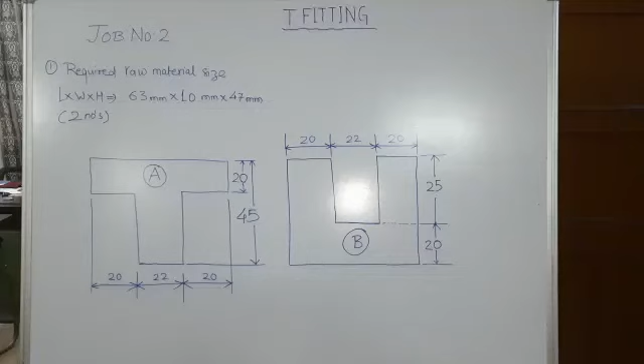This is job number 2, T fitting of the fitting shop.

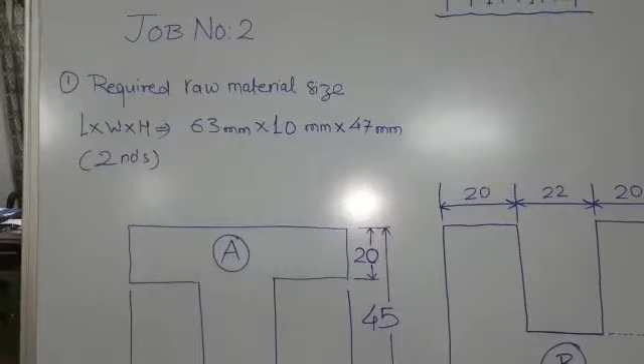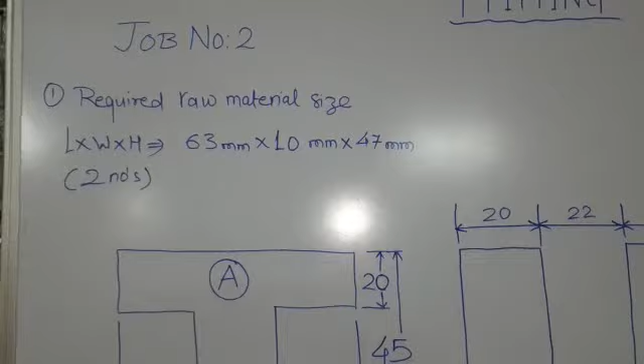The size of the required raw material is MS flat, mild steel flat, having length, width and height of 63 mm, 10 mm and 47 mm respectively. And these are the dimensions which we will achieve after the different operations.

The final job will look like this: T fitting.

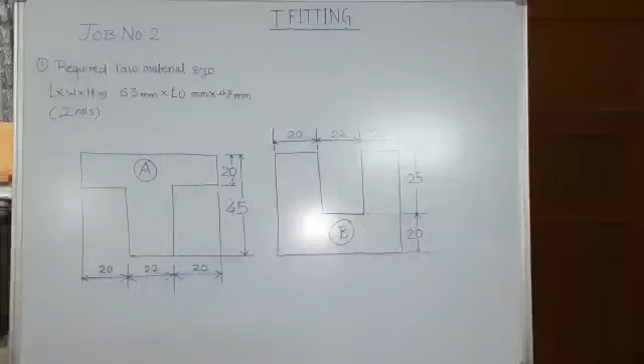Now we start to make a T fitting from the given two MS flats. The tools required are bench vise, steel rule, square, tri-square, ball peen hammer, scriber, hacksaw blades, dot punch and center punch, surface plate, vernier height gauge, rough and smooth flat file, flat chisel and triangular file.

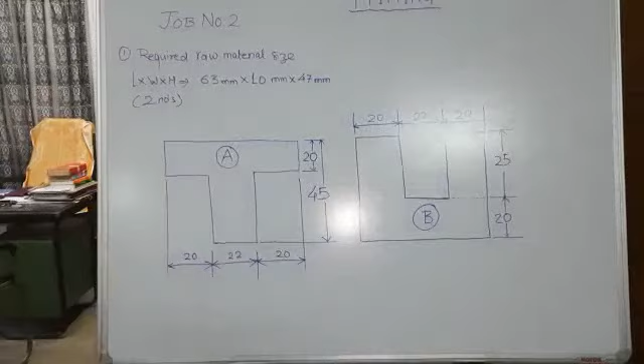Sequence of operations will be: filing, checking of flatness and squareness, marking and measuring, punching, sawing, chipping and finishing of the workpiece. Again we will start the procedure.

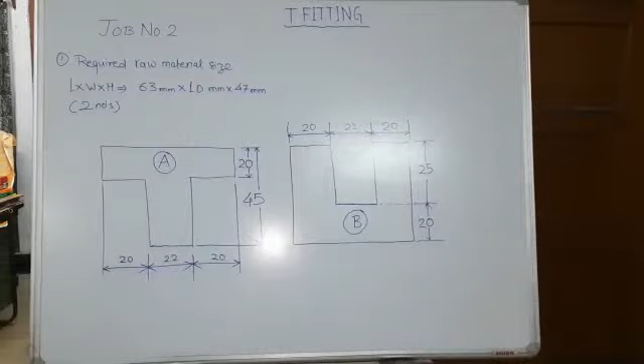First we measure the dimensions of the raw material. These are the two raw material MS flats. You can see after the cutting there is burr. The burr in the piece is removed and the dimensions are checked with the steel rule or vernier caliper.

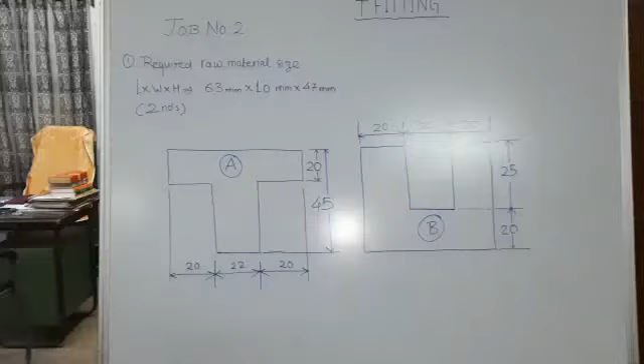Sequence of the operation will be filing, checking of flatness and squareness, marking and measuring, punching, sawing, chipping and finishing of the workpiece.

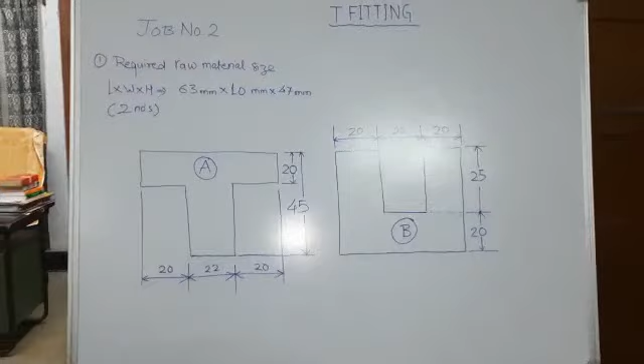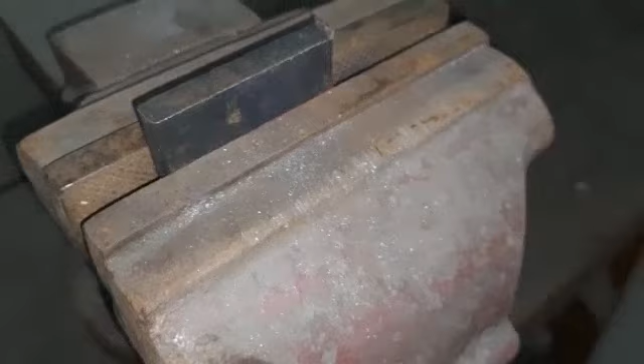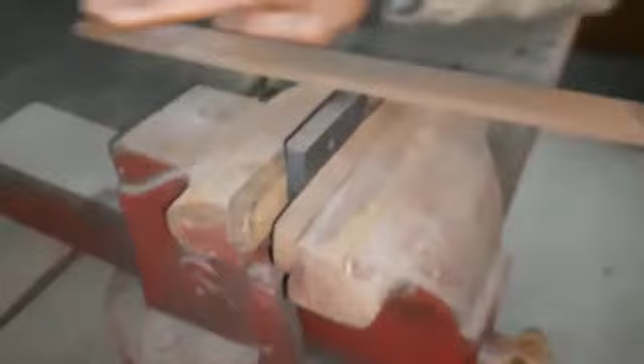Now this job has been fixed in the bench vise, and with the help of a rough file we will remove the burr from this metal. Now you can see after the filing operation, the burr has been removed from the surface of this workpiece.

Again we will remove this job from the bench vise and go for measuring the dimensions of this MS flat. Now you can see these two raw materials, and we will check the dimensions one by one.

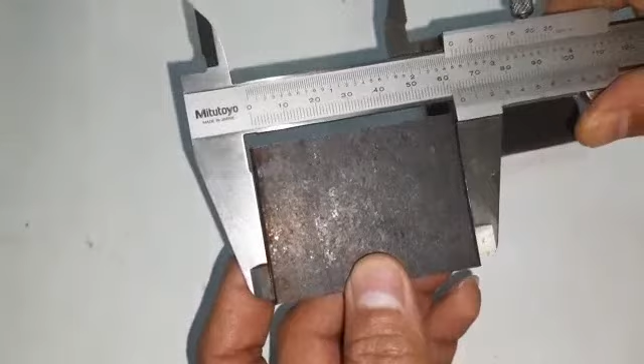You can see 63 in length, and 47 in height. In width this is 9.6. Okay, now we will take the second one.

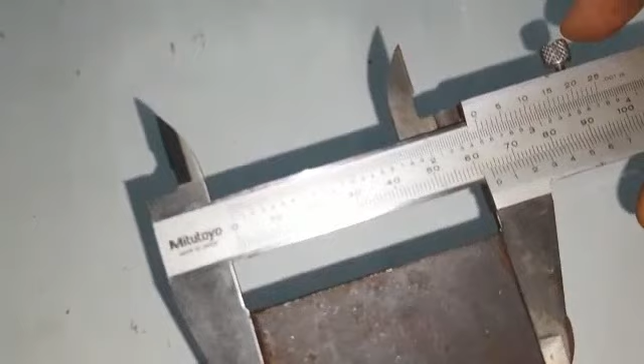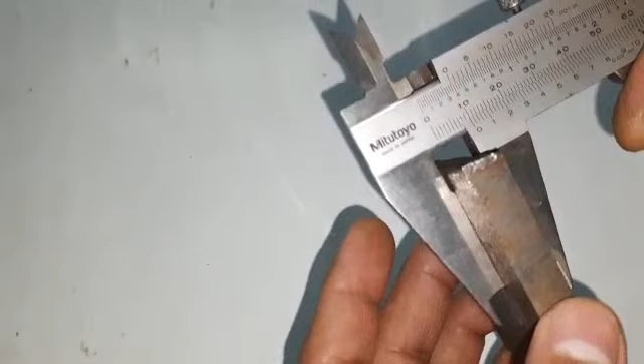Length is 62.5, height 47.5, and width is 9.7.

Now these two pieces are clamped one after the other and the outer mating edges are filed using rough and smooth file to achieve the dimensions: 45 in height, 62 in length, and thickness of 9 mm. Both pieces are filed to achieve these dimensions, and then we go for further operation.

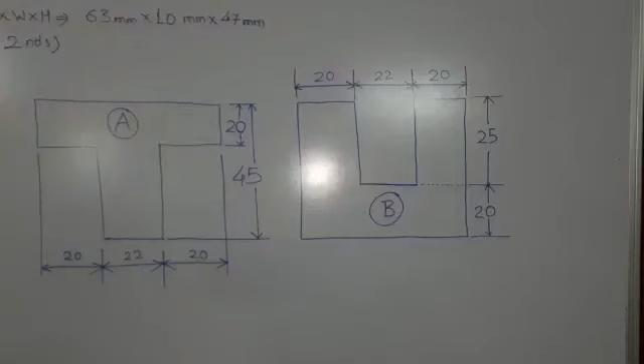First we start filing on these pieces. After the filing operation, with the help of the tri-square we check the flatness, straightness and squareness or right angles between adjacent sides of both workpieces.

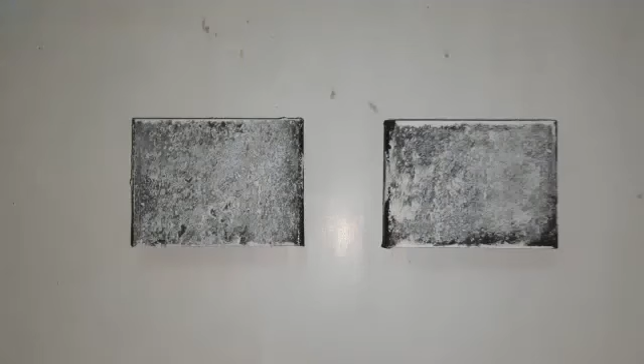We have applied chalk on the surface of both workpieces, and we will first mark up 20 mm dimension at the bottom side with the help of the vernier height gauge.

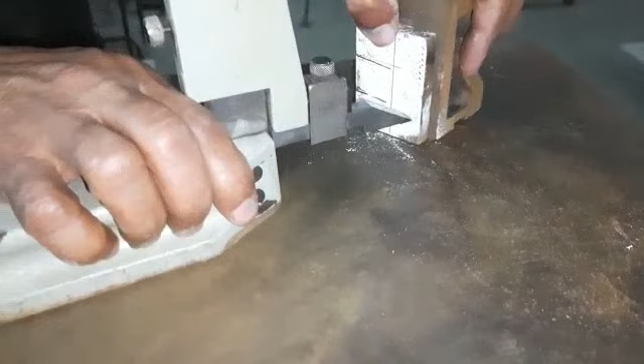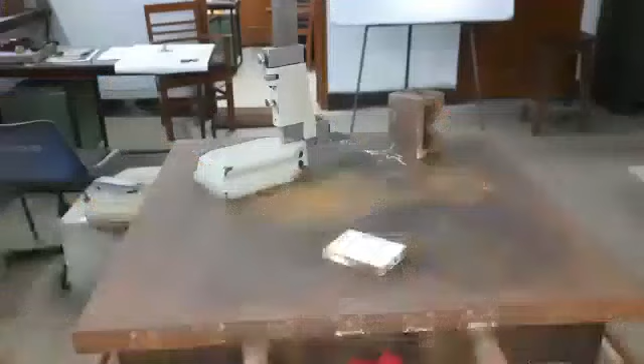Now we have done the marking on the job. As per the diagram, we will remove this part from the workpiece, this part and this part, and with the help of the dot punch we will mark here.

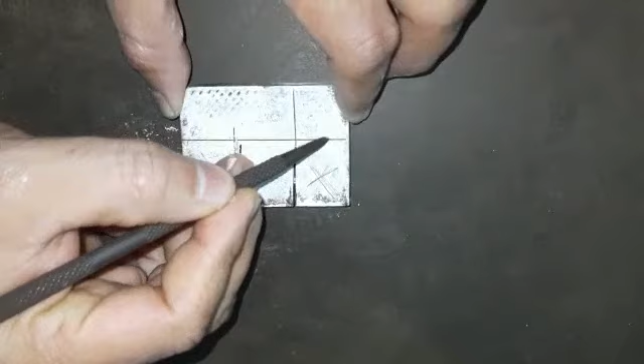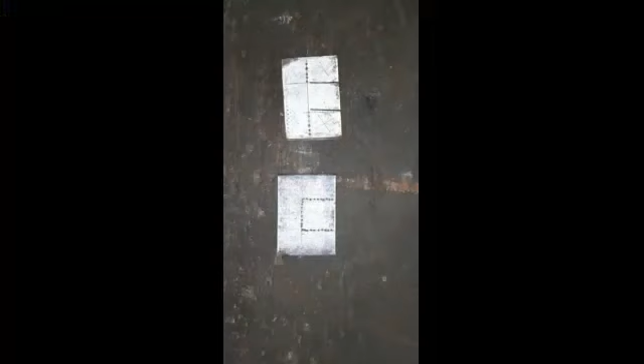The punching operation is carried out. Now we can see clearly both workpieces have been marked with the help of the dot punch. This is job number A, and this is job number B.

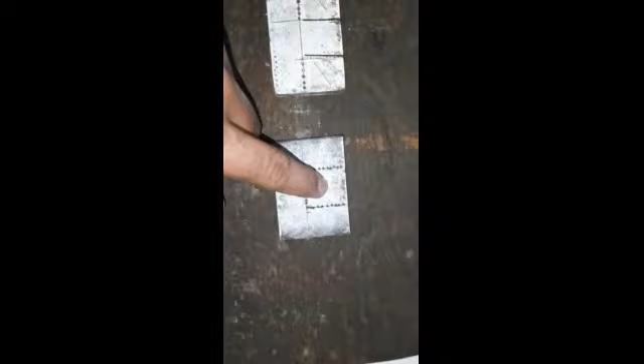In job number A, we first remove the material at both sides, and in job number B we will remove the material at this point, this part of the material.

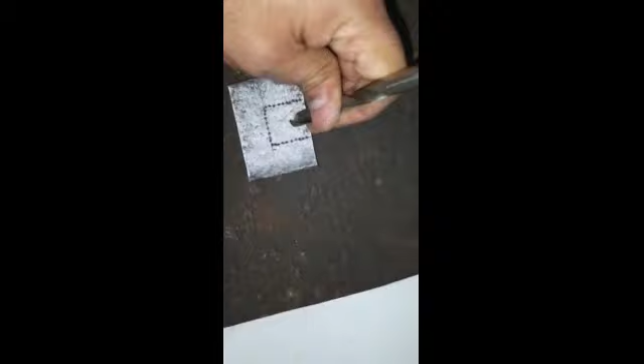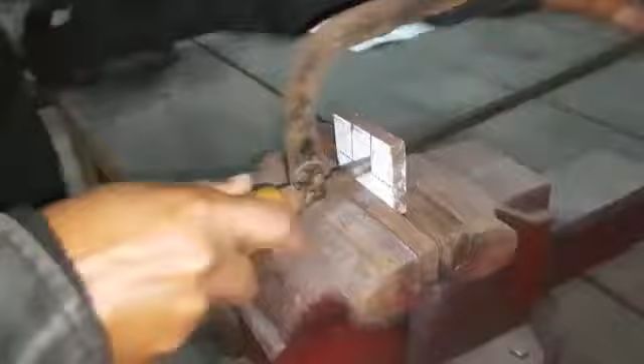We will go for the next operation, cutting, with the help of the hacksaw. We can see here clearly the cutting operation is done. We are removing this material from the bench vise.

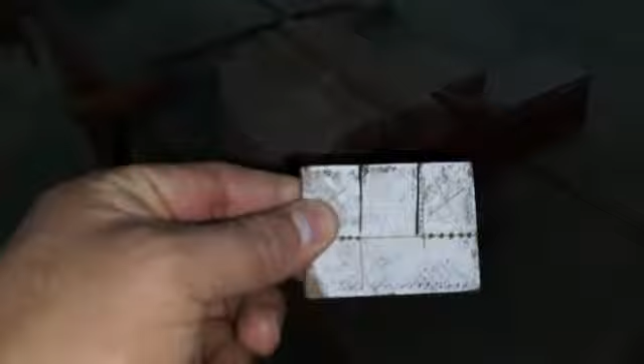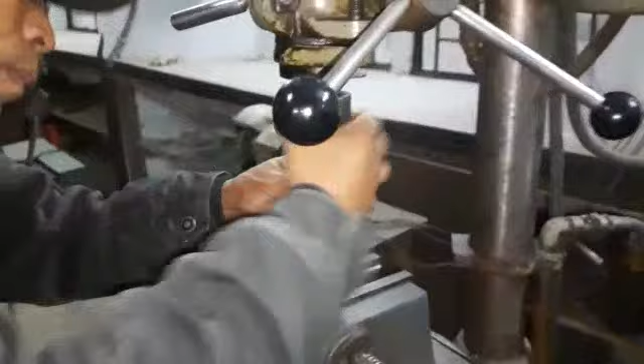This cutting operation is over, and now we go for the drilling operation to remove the unwanted material from part B. A 9 mm drill bit has been fixed in the sleeve, and our workpiece part B is fixed in the drill vise. Now we start the drilling operation.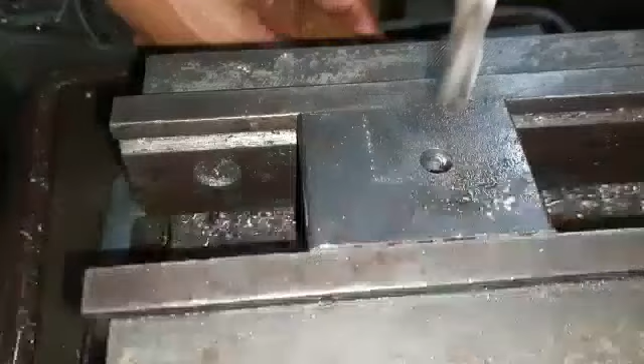Now we get the clean surface after the first drill. Again we are attempting the second drilling operation.

Now the drilling operation is over, and with the help of the chisel we will remove this material using the ball peen hammer.

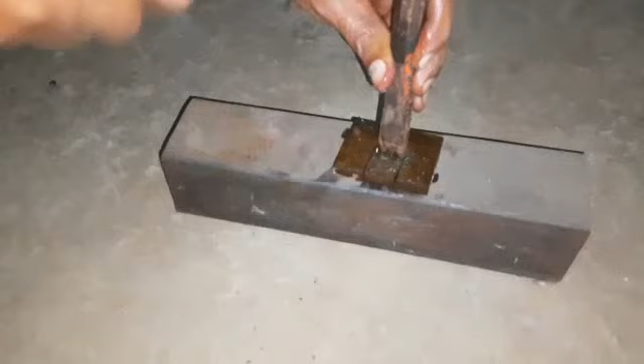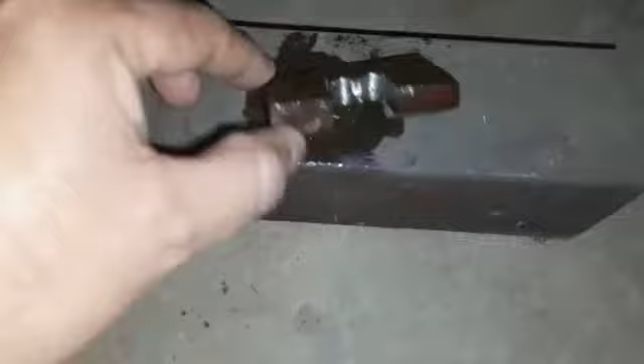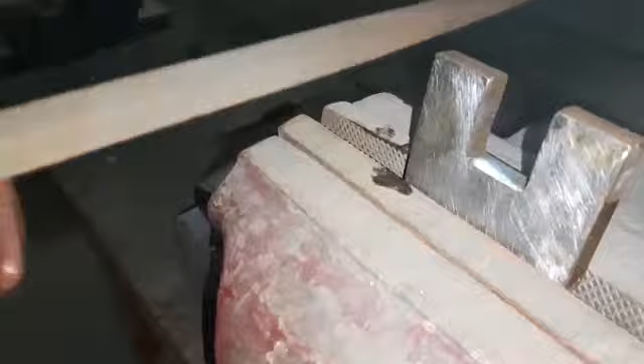Now you can see the material has been removed. We will clamp this workpiece in the bench vise again, and with the help of the rough file we remove the extra material to achieve flatness at this surface. With the help of the square file we flatten the unequal part of the workpiece, and now our part B is ready.

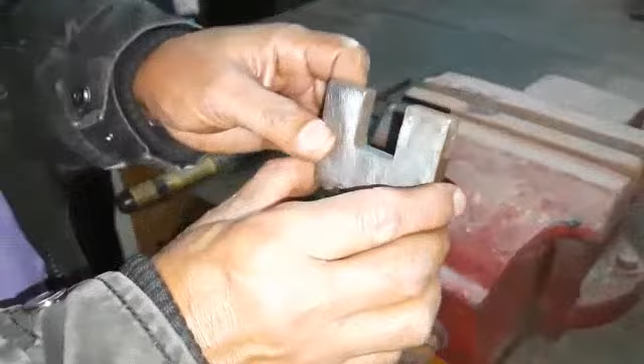Remove it from the bench vise. Now the corners of the stepped surfaces are filed using the square or triangular file to get sharp corners.

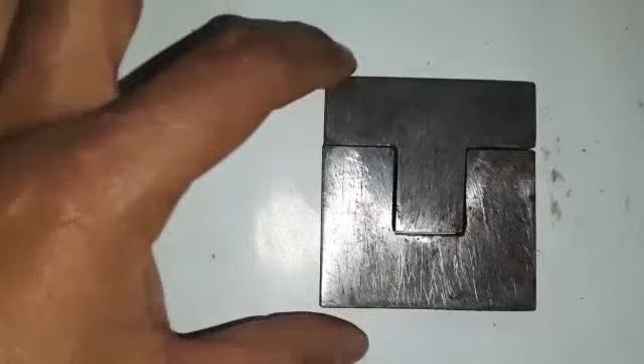In this manner our job number 2, T-fitting, as per the required dimensions, is prepared. Thank you.